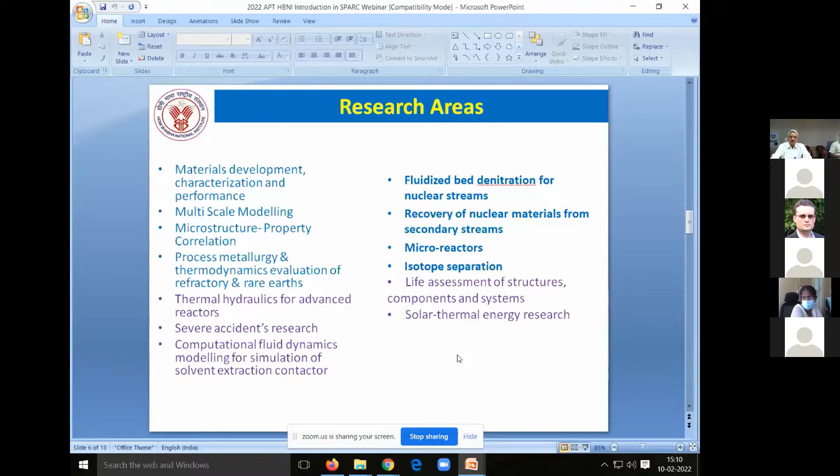So these are the various areas. However, particularly in our lab, we have been mostly pursuing research in mathematical modeling, control, estimation, and fault detection.

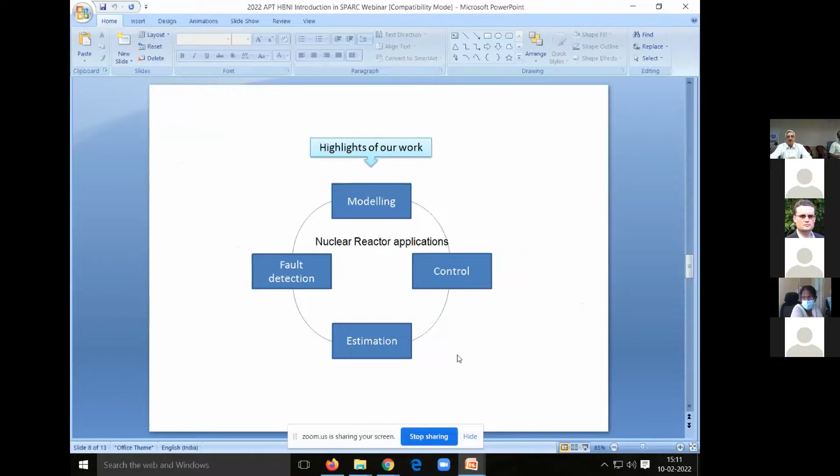Out of our effort, we have been able to make a real-time simulator of a nuclear reactor where we can study normal and off-normal conditions of a plant, of course not the accidental situations. This is mostly used to validate the C&I systems design using a hardware-in-loop kind of testing.

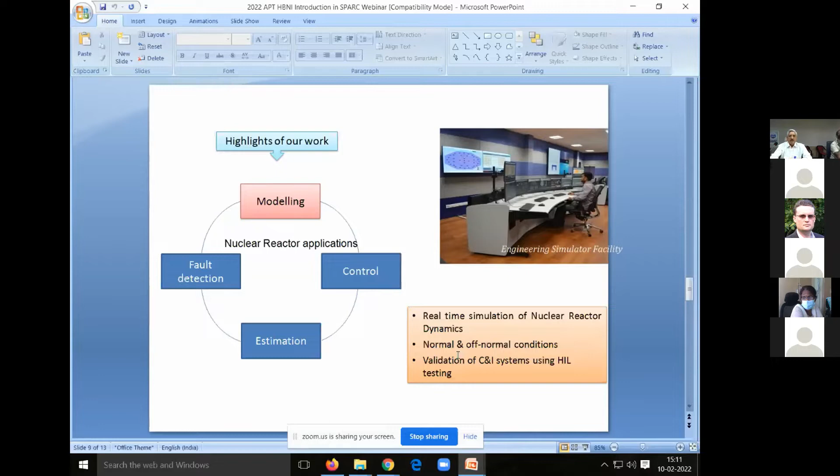We have done some control studies based on linear quadratic regulators, sliding mode control, etc. Conventional output feedback also we have done, fast output sampling, periodic output feedback.

I want to mention that in 2006, our Tarapur atomic power plant was facing a lot of instability issues. So we did analysis based on the most simple linear stability analysis. We redesigned the controllers and applied our knowledge to solving the real life problem at the 540 megawatt Tarapur atomic power station.

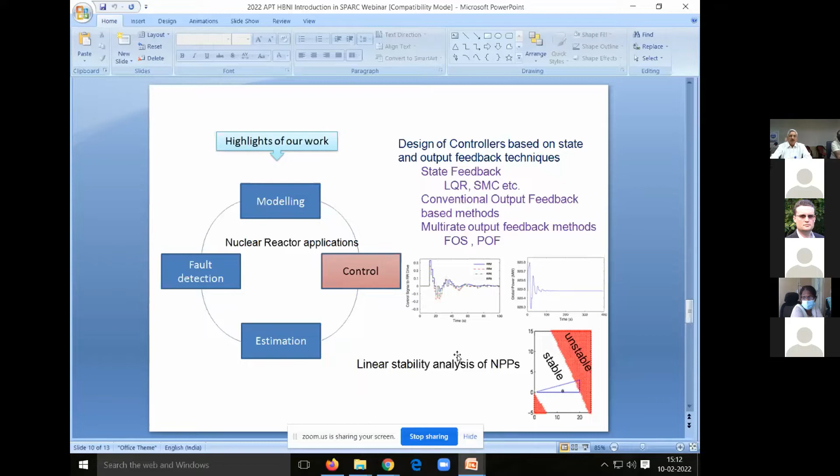In the area of estimation, we have developed a reactivity meter which is used in our small nuclear reactors for measurement of reactivity worth of burnable pins, fuel rods, and protection devices.

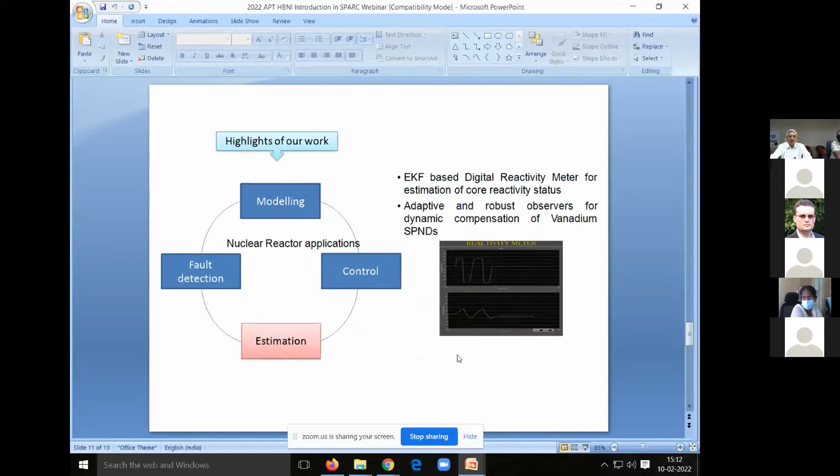In fault detection, we have applied principal component analysis and other techniques for sensor fault detection and diagnosis in some areas of nuclear reactors.

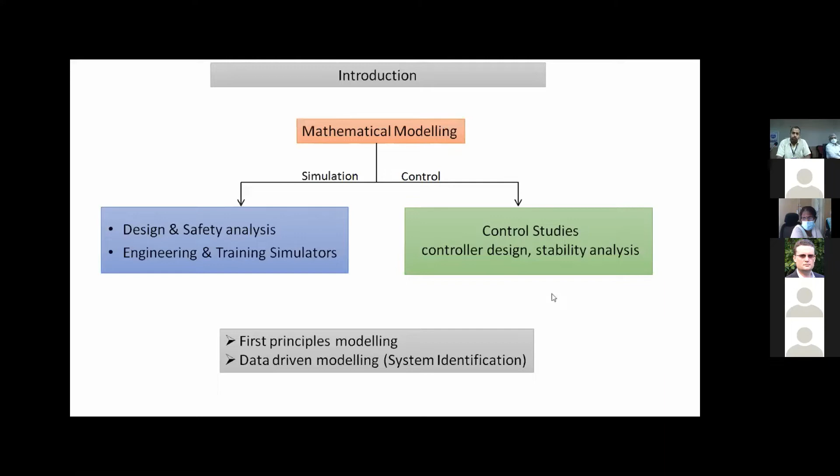A thermal reactor consists of fuel, coolant, and moderator. Coolant transports the heat generated in the nuclear reactor, moderator slows down or thermalizes the fast neutrons that emanate from the fission reaction, and the reflector surrounds the core to prevent leakage of neutrons from the core region.

However, some of the neutrons will also be liberated from the beta decay of fission products, and this fraction, even though minor, significantly helps in controlling the nuclear reactor dynamics. So these fast neutrons undergo scattering collisions with the lighter nuclei, and then in that process they get slowed down. Some of them get leaked out from the core region, and they cross a kind of wall called the resonance wall, wherein non-fission absorption takes place within the fuel itself, and then whatever leftover neutrons there are, they thermally diffuse, and finally get absorbed in a fission reaction, or get absorbed in a non-fission reaction.

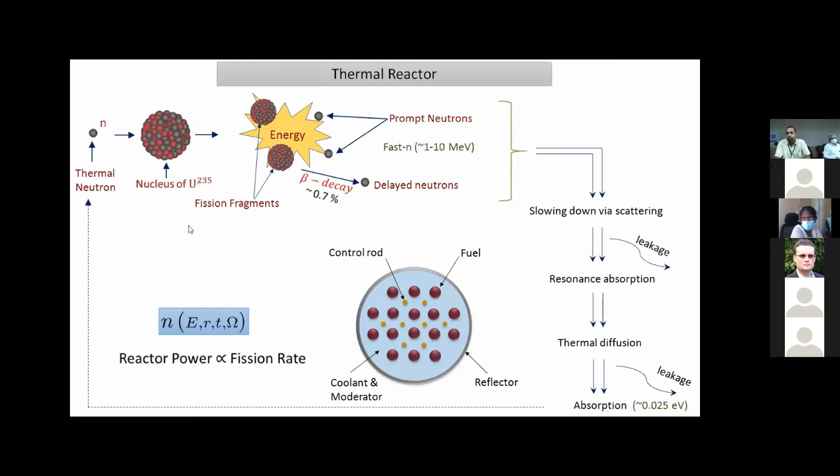So even though the fundamental governing equation is transport theory, diffusion theory based approximation is widely applicable and used in nuclear reactor analysis. In diffusion theory, first the continuous energy spectrum of neutrons is converted into discrete energy groups, and then depending on the number of energy groups, we have one group diffusion theory or multi-group diffusion theory. Specifically in multi-group diffusion theory, there's the two energy group theory, where we discretize the energy group into fast and thermal neutron groups, and one group diffusion theory are used in modeling for control studies as well as for real-time simulators. Many energy groups are generally of significant interest to physicists, which they use in lattice calculations or design calculations.

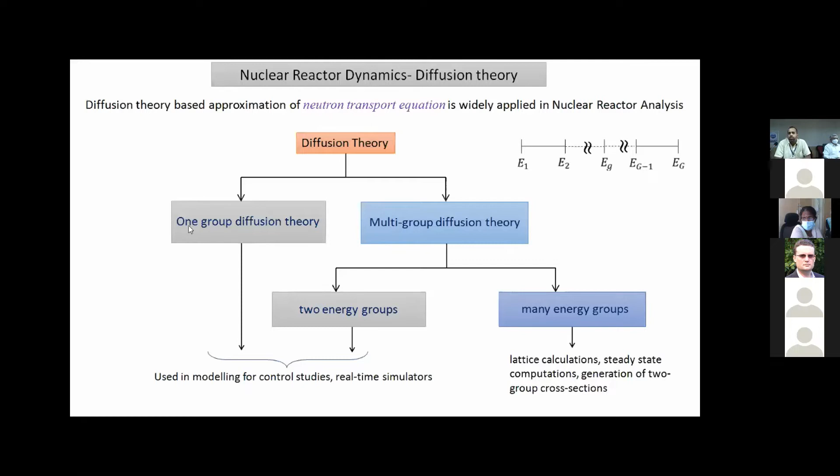So coming to the one group diffusion equation, it is nothing but a neutron balance in any arbitrary volume V. As shown in this equation, the time rate of change of neutrons in any arbitrary volume V is equivalent to the production term minus absorption in the volume V and net leakage from V. The net leakage term, since we are approximating with diffusion theory, can be directly written in terms of the flux gradient using Fick's law.

And the source basically consists of two terms. One is the neutron generation, that is the prompt neutron generation term, and the other whose dynamics is dependent on the decay, beta decay of the precursors. Generally, these precursors are grouped into 6 normally, or more conventionally. And then in addition to this diffusion equation, we have to study the time dependent dynamics of these precursors to account for the total neutron source production within a volume V.

The usual approach to solve this PDE is separation of variables into a space dependent term and a time dependent term, and by assuming that the time independent space function, or assuming that the fundamental shape of flux within a core doesn't vary much with time, we can obtain a set of ordinary differential equations, popularly known as the point kinetics model of a nuclear reactor, where it consists of the dynamics of neutron concentration and the precursors, and a term known as reactivity rho is an input to this model.

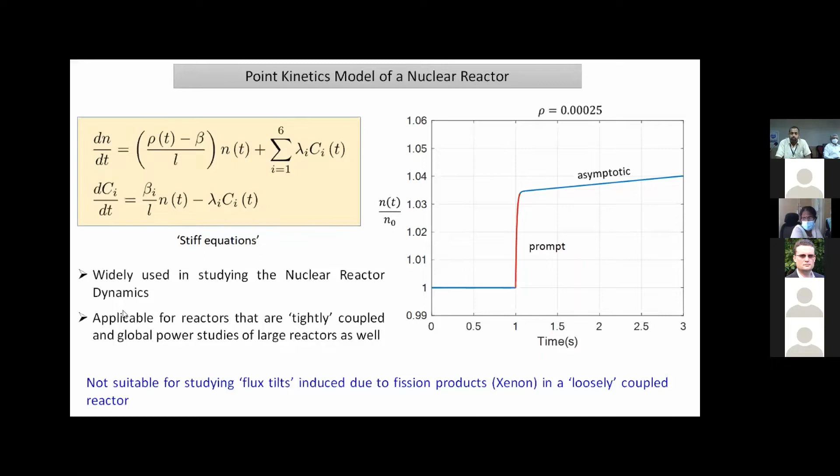Now a quick glimpse of how xenon affects reactor dynamics. Xenon is one of the fission products, and even though its yield is very low, it has a very high thermal neutron absorption cross section. Due to this, the dynamics of xenon following any instantaneous flux change will be opposite to the direction in which the flux has changed. For example, when there is an instantaneous flux reduction, xenon concentration initially builds up because of reduced absorption, and after a long time it achieves a peak and its behavior starts inverting. Such inverse behavior poses a serious control problem, causing out-of-phase spatial oscillations in loosely coupled reactors.

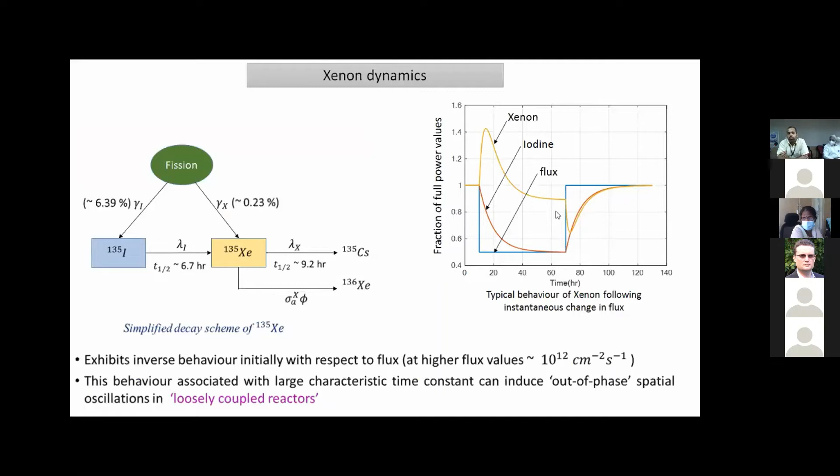So how do these oscillations occur, and in which direction? For any 3D problem, we can consider oscillations of three modes: azimuthal, radial, or axial, where plus indicates one half of the core and minus indicates the other half. Power in one half of the core can have an opposite trend while flux in the other half has an inverting trend during spatial oscillations. Higher order harmonics are also possible depending on the type and dimensions of the reactor.

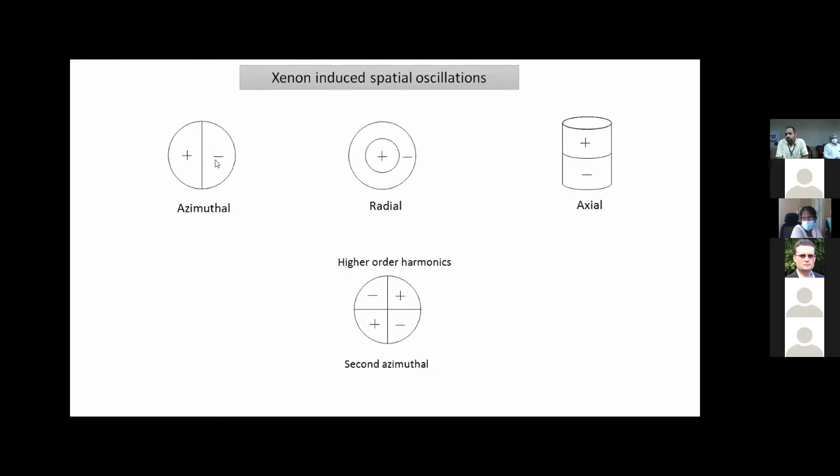Here I have shown a simulation where a typical PWR exhibits xenon-induced spatial oscillations. In PWRs, control rods are normally distributed radially to avoid asymmetric reactivity perturbations along radial directions. However, for power maneuvering during power operations, these control rods move from the top of the core towards the bottom. This can lead to asymmetric perturbations along the axial direction, and if left uncontrolled or unmonitored, they can lead to out-of-phase oscillations as shown here.

Even though the total power remains more or less the same, one half of the core starts generating more power and the other half generates very little power. So on one side, the core thermal margin limits may be exceeded, which can be a serious safety concern. For this purpose, in PWRs, axial offset is generally monitored during normal operation, and if required, spatial control is invoked automatically to ensure the axial offset stays within the target band.

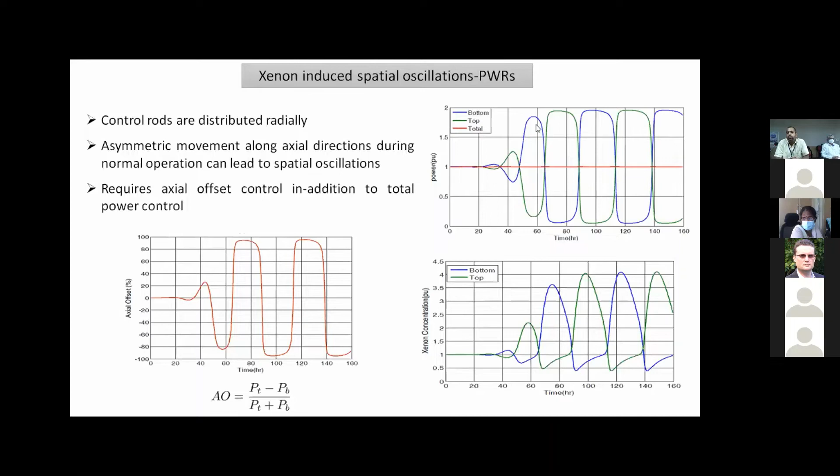Similarly, there is a reactor called the advanced heavy water reactor, which is a boiling water, vertical pressure tube type reactor using light water coolant and heavy water moderator. This reactor has very large radial dimensions, due to which azimuthal neutronic decoupling can happen, and xenon-induced spatial oscillations can occur along the azimuthal direction if not monitored and controlled.

Hence, to study the dynamics of these reactors, we need a space-time kinetics model rather than a point kinetics model, both for simulation and controller design. There are many standard techniques in the nuclear reactor domain to model such reactors, including modal methods, flux synthesis methods, or nodal methods. Multi-point kinetics modeling, developed under the nodal methods framework, is prominently used in control and simulation studies, which I will be presenting.

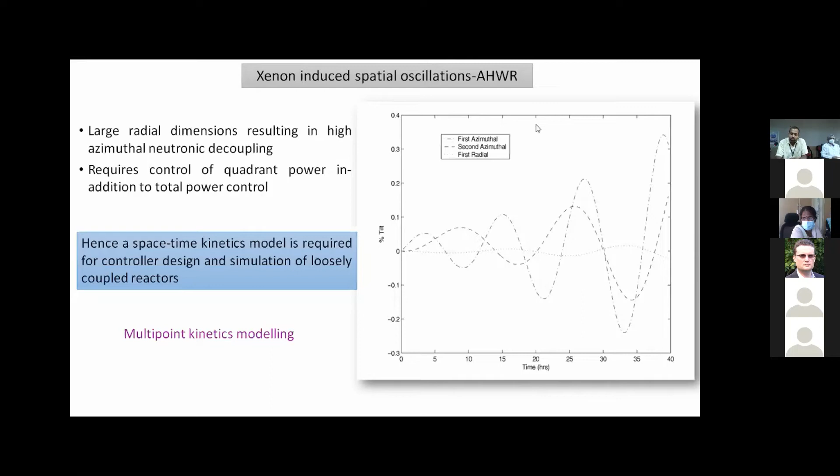Again, the governing equation is the diffusion equation, but in the case of the two-group diffusion equation, we have to write it separately for fast flux and thermal flux. The source term remains the same and occurs only in the fast flux dynamics, because whatever neutrons are released subsequent to fission are fast neutrons.

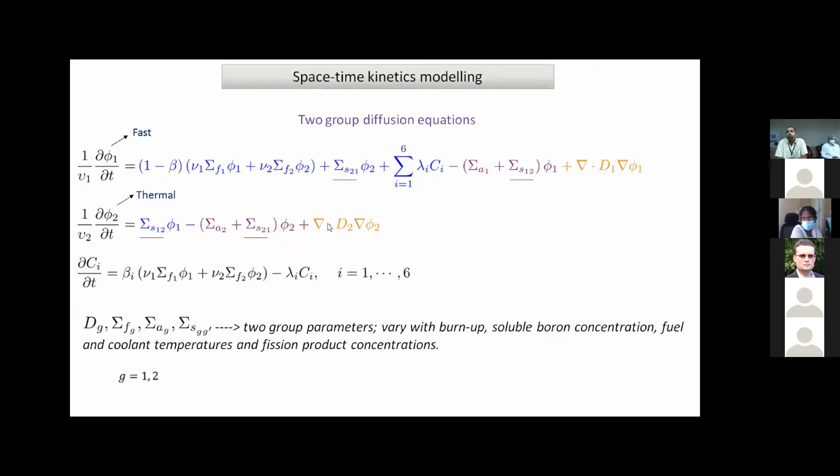In addition, we have scattering terms, where there can be upscattering of a thermal neutron gaining energy and converting into a fast neutron, or a fast neutron losing energy due to scattering and becoming a thermal neutron. These two scattering terms are additional compared to the single-group diffusion equation. The absorption cross-section, diffusion coefficients, and fission cross-sections together form what we call the two-group parameters, which normally depend on the moderator and coolant properties in the reactor core.

Since those diffusion equations are partial differential equations, one method to solve them is to discretize these partial differential equations along all the spatial directions, by dividing the core into a number of non-overlapping coarse meshes called nodes. Each node can be characterized by a set of homogenized two-group parameters, and each node can be defined with a homogenized flux, which is a volume integration of the flux within that particular node.

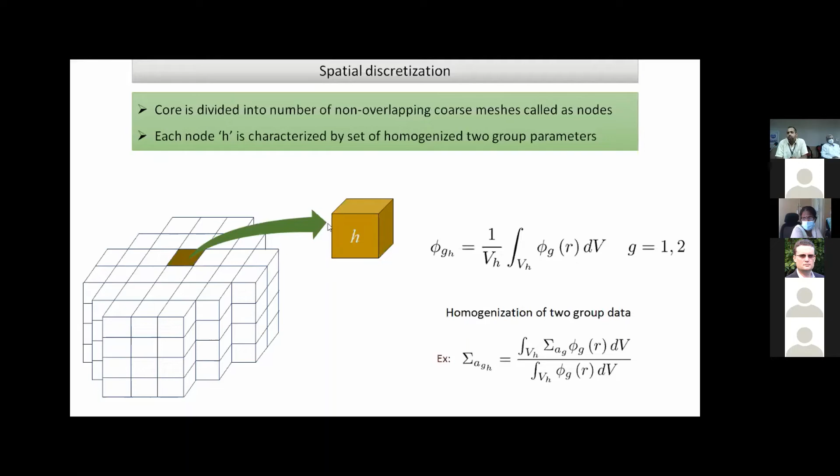In this manner, by integrating the differential equations in a node, we can get rid of the partial differential terms with reference to flux, and with reference to the leakage term or the diffusion term, we can have a coarse mesh finite difference approximation.

By enforcing continuity across the boundary, we can approximate the leakage term as a function of adjacent nodal fluxes and a coupling coefficient, which signifies the coupling between adjacent nodes. This coupling coefficient determines the coupling between two nodes and is a strong function of the node geometry and also the diffusion coefficient.

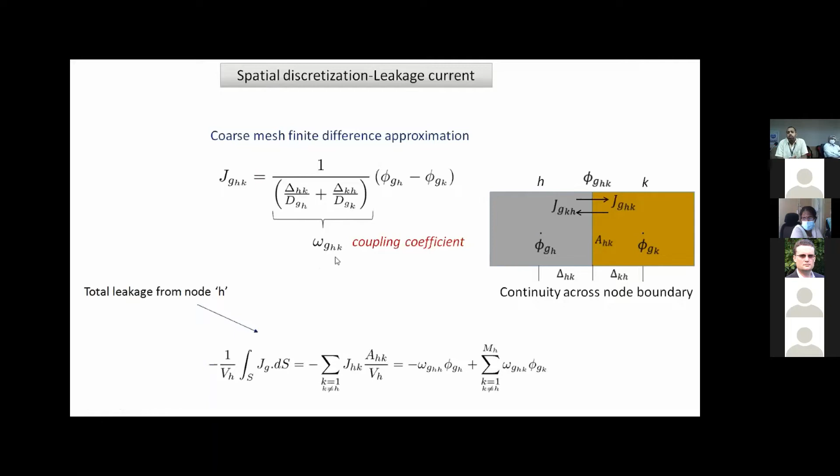In this way, we can integrate the diffusion equation, which is a partial differential equation, and obtain a set of ordinary differential equations within the node, which can be readily solved in time to obtain the dynamics of fluxes within each node, thereby obtaining the temporal as well as spatial behavior of the reactor.

However, further approximations can also be done to obtain the differential equations directly in terms of power, which can be used mainly for control studies. Till here, this set of equations are mainly used in simulators, whereas further approximations are also possible for control studies to reduce the model order.

By defining a spectral index, that is the ratio of fast flux to thermal flux, and assuming that it can be completely defined in terms of two-group parameters, we can convert that two-group diffusion set of ordinary differential equations into a single power-dependent equation by using this approximation, which is normally known as a 1.5 group approximation.

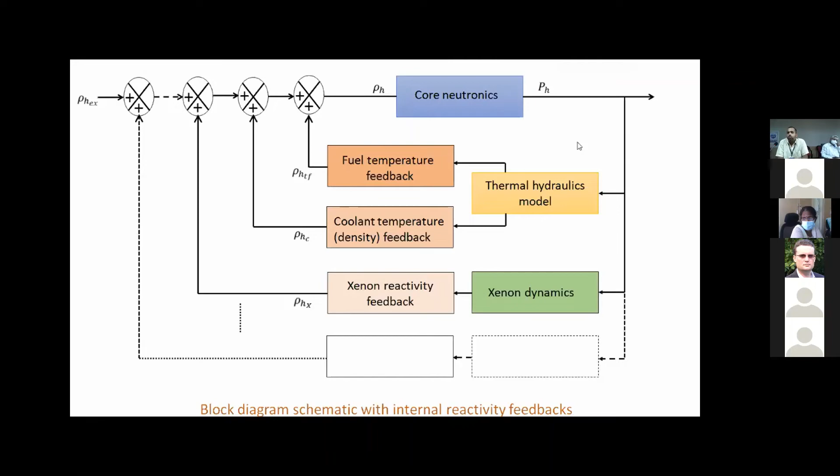For example, thermal hydraulic feedbacks may have characteristic time constants in the order of seconds, whereas xenon feedback will have characteristic time constants in the order of many hours. So it is essential to consider dynamic models of these thermal hydraulic feedbacks along with xenon feedbacks to account for the total overall neutronic dynamics within the core.

So fission product poisoning within the node can be directly obtained by writing the decay models within the node. Fundamental formulations as shown earlier will be in terms of flux. However, with a usual change of variables, we can represent this in terms of power. Net reactivity due to xenon or due to some other poison like samarium can be directly obtained based on their concentration values.

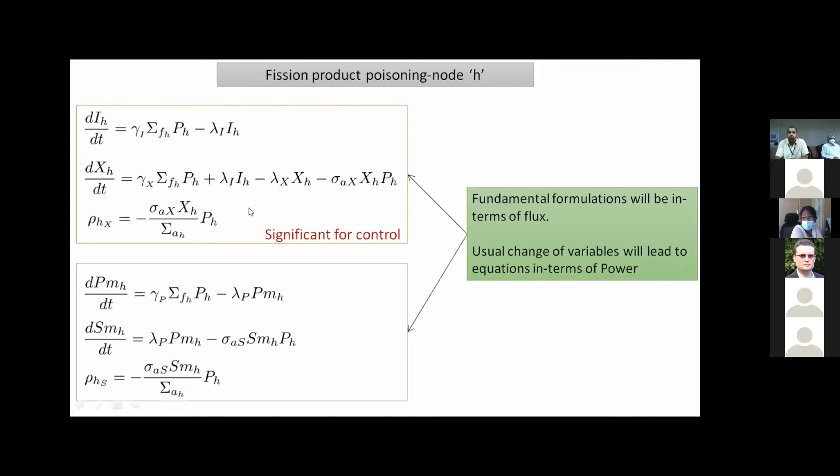Now coming to thermal hydraulics modeling of PWRs. PWRs generally consist of fuel pins which are mechanically grouped into fuel assemblies. However, there is no hydraulic isolation among the fuel assemblies. So ideally, a thermal hydraulic problem in PWRs is a 3D problem, and it is solved in that manner mainly for safety analysis, to identify the hotspot or the hottest fuel pin. However, for control studies, such elaborate and complex models cannot be directly used.

So we resort to two major types of approximations. One is assuming multiple channels in parallel, connected only at the inlet plenum and outlet plenum, so that there is no interaction among fuel assemblies within the core region. Or another approximation is a single channel connected only at inlet and outlet plenum, and across the axial direction we assume whatever power is produced is given to the coolant in a lumped fashion. Since we generally nodalize the PWRs along the axial direction, the second choice is normally followed in modeling the thermal hydraulics of the heat removal system in a PWR.

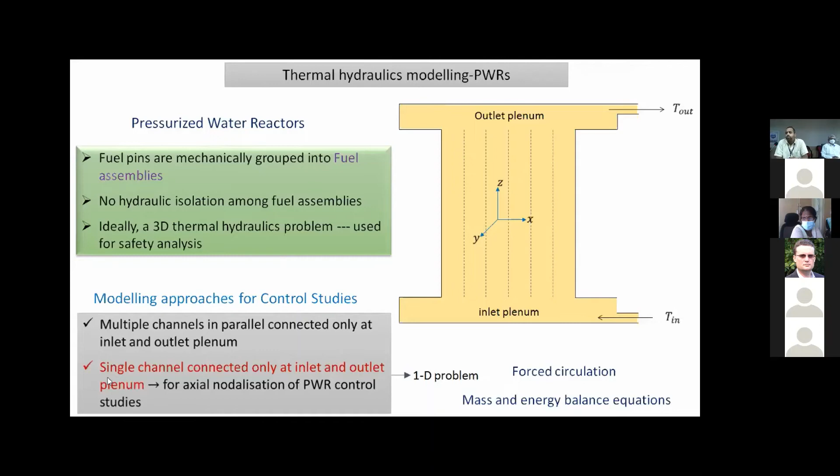And since most PWRs have forced circulation, mass and energy balance are normally sufficient from a control studies point of view. The flow will be based on the number of pumps that are operating under various operating conditions.

However, when it comes to BWRs, these fuel pins are enclosed by flow boundaries, which can be cans, ducts, or channels in case of AHWR. So essentially, these fuel assemblies are isolated, and it becomes a 1D problem at the assembly level. However, within the assembly, the flow behavior can still be a 3D problem, which is again of specific interest for safety analysis. Since one of the BWR examples I have taken is AHWR, and nodalization along the radial direction is most preferred for that kind of reactor, we follow the approach of multiple channels in parallel connected only at inlet and outlet plenum.

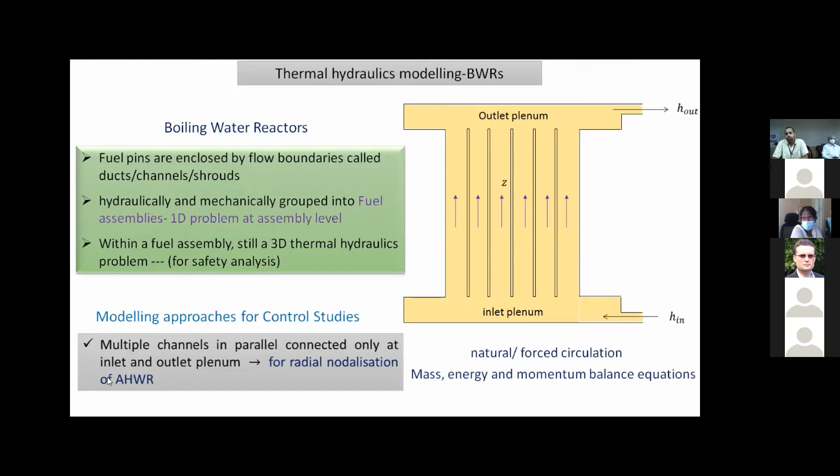However, BWRs, especially AHWR, have natural circulation. So in addition to mass and energy, we have to consider the momentum balance equation also, to obtain the governing equations of these thermal hydraulic models, which can be used for control studies.

Now I'll try to summarize how the thermal hydraulic model set of equations looks for a typical PWR and AHWR. This figure shows a simplified schematic of a PWR, wherein the coolant from the cold leg enters into the core region, picks up the nuclear heat generated, and is transported via the hot leg back to the steam generator. In the steam generator, cold liquid or feed water enters, and heat from the primary heat transport system or reactor coolant system is transported to the secondary system, and the steam generated in the steam generator is transported to the secondary cycle.

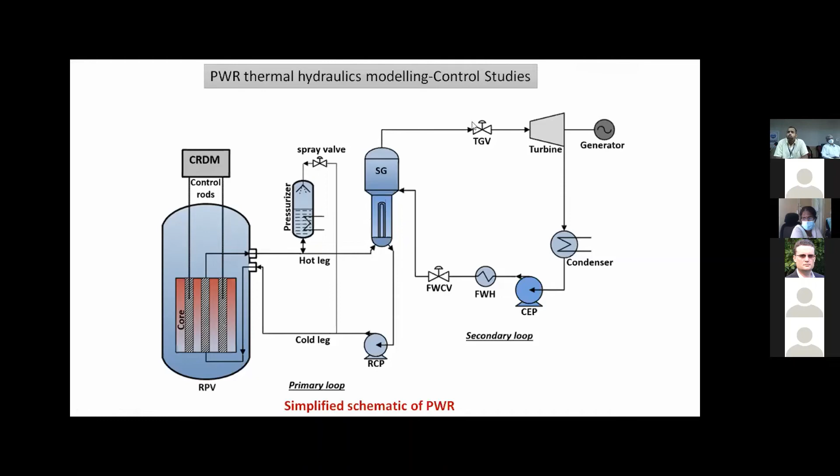From the modeling perspective, we can divide this entire reactor coolant system into 4 regions. In the core region, the modeling approach is as indicated earlier, a single channel coupled only at inlet plena and outlet plena. At the core exit, there is a finite volume of hot leg, denoted as control volume 1. Heat transfer in the SG is control volume 2, and the cold leg is control volume 3.

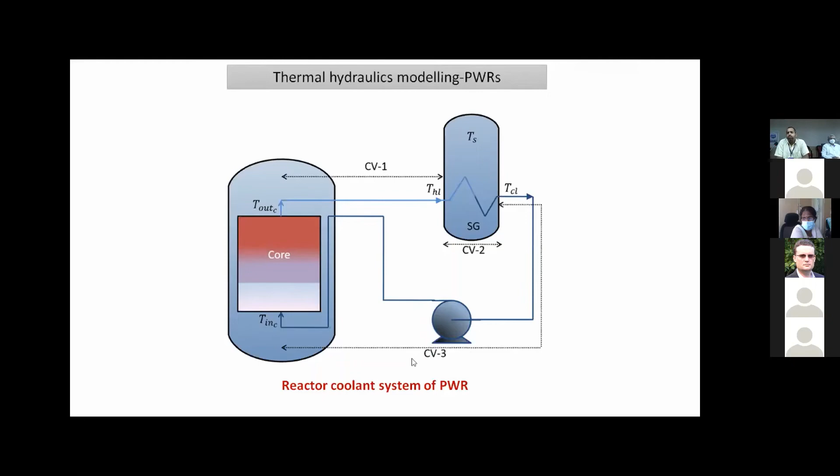So what we can really do is go for a lumped parameter modeling to account for the transport lags that occur in this hot leg, cold leg, and the heat transfer volume. And in the core region, we can model the system as per the number of axial nodes.

Within the core region, by writing the energy balance equation and assuming only convective heat transfer from the fuel element to the coolant, these are the set of equations which define the heat transfer from the reactor to the coolant. Here we can see that P_h, obtained from the core neutronics, is coupled to this fuel heat transfer model, and then through the convective heat transfer coefficient, the coolant temperature dynamics can be defined.

These nodes along the axial direction are thermal-hydraulically coupled such that the outlet from one bottom axial node becomes the inlet temperature to the top axial node residing above it. Then reactivity feedbacks associated with fuel temperature and coolant temperature can be expressed as polynomial functions, normally first order or second order.

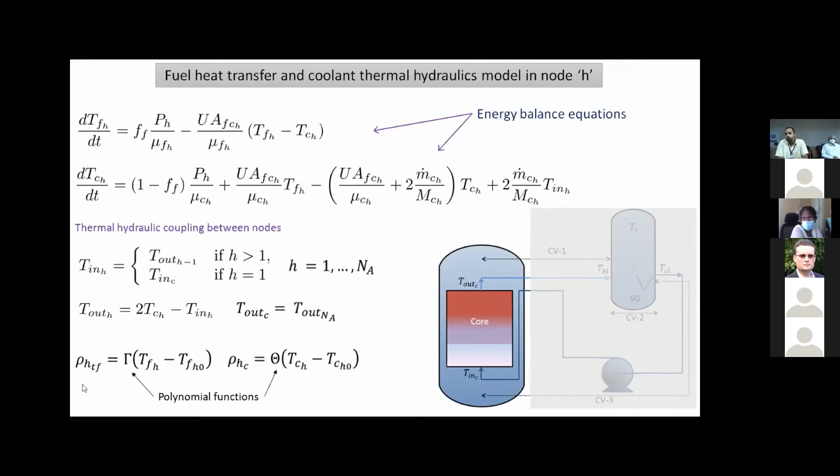As indicated, the transport delay in the cold leg and hot leg can be accounted for by using simple energy balance in these sections, so that we can obtain a set of first order differential equations in each section.

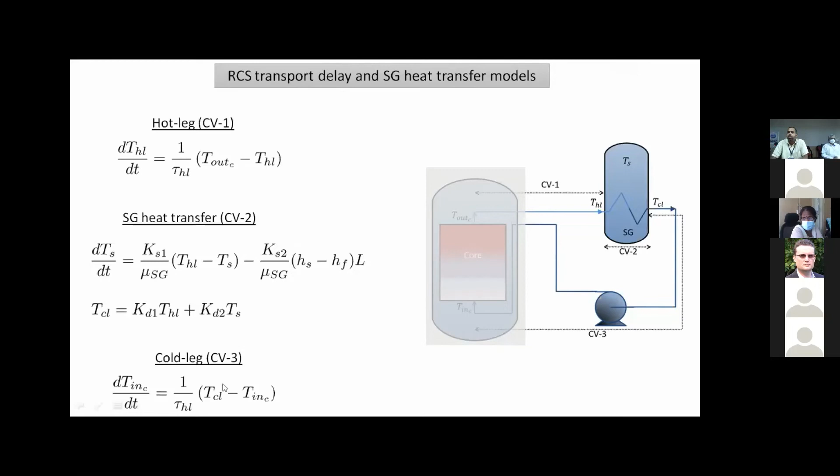Now when it comes to BWR modeling, I'll give a typical example of how advanced heavy water reactor thermal hydraulics modeling is carried out.

As indicated earlier, this is a natural circulation reactor, so we need to consider the momentum balance equation to obtain the circulation flow, which cannot be considered as an independent parameter.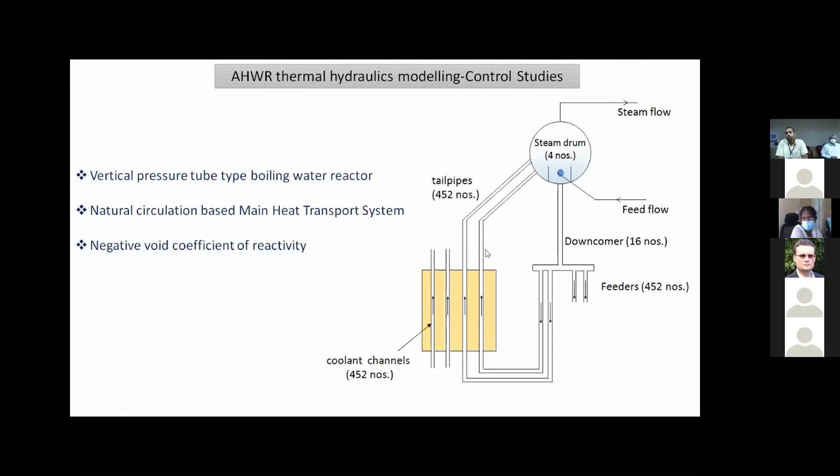So modeling approaches generally used for control studies - one is the homogeneous equilibrium model, in which we assume that both the water and steam phases have the same velocity and are under thermal equilibrium. With this, void fraction can be expressed in terms of the steam quality or flow quality.

This figure shows a typical variation of void fraction with various pressures, and void fraction basically determines the density of the coolant. So depending on the void fraction, we can compute the density, and depending on the density, we can compute the corresponding reactivity feedback that can be fed back to the neutronics model.

The approaches used here are lumped parameter integral average approaches to solve mass and energy balance in each lumped section.

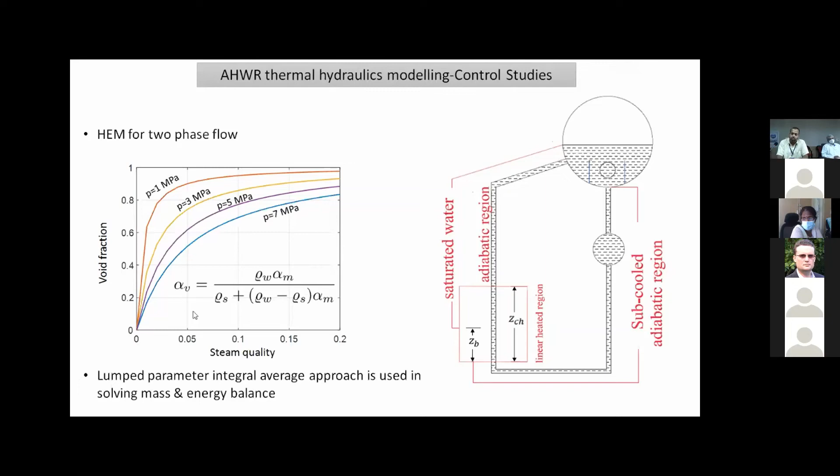So a typical example of how we write equations for the core region - we consider an inlet flow, circulation flow, and an inlet enthalpy to the core region, where some amount of heat is used to convert this single phase liquid into saturated liquid, and afterwards the heat transfer is in the two-phase regime. As it is a compressible flow, outlet flow will not be equal to inlet flow.

So we have to write both mass and energy balance equations, and by simplifying these we can get rid of the exit flow and cast the equations in terms of the inlet circulation flow itself. One of the state variables will be the flow quality or steam quality.

Then void fraction can be directly obtained using a static relation with steam quality, and density can be computed from the void fraction, from which we can obtain the void reactivity feedback. Equations for other sections also can be obtained in a similar fashion.

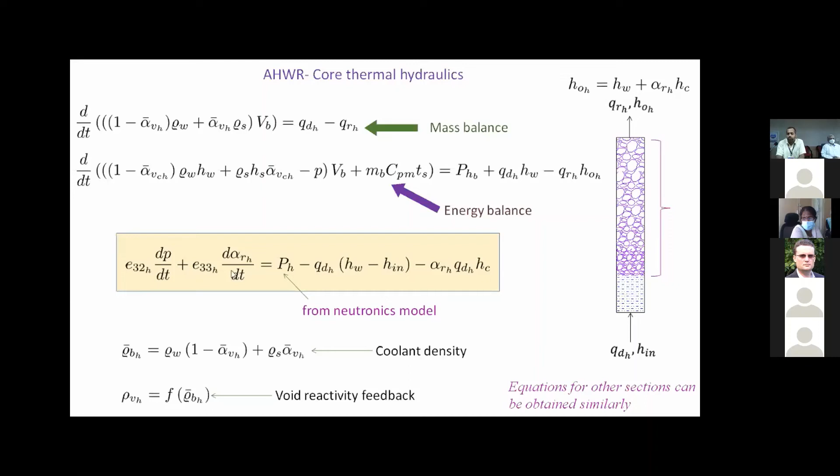So in a crux, the overall model used for control studies looks like this. The central part is the core neutronics model, where in each node we have a set of differential equations defining the precursor and power dynamics within that particular node.

This is coupled with the fuel heat transport and coolant thermal hydraulics model, and then the feedbacks from this model are used internally in the neutronics model, similarly for xenon and samarium dynamics.

This thermal hydraulics model is coupled to the secondary side, where a load demand can be considered as an external input. Through this transport lag, it is coupled with the fuel heat transport and coolant thermal hydraulics model.

In addition to this, we have a control signal which we are supposed to control through the design of an automatic power controller. This can be considered as one more input, and depending on the control rod dynamics, we can compute the position of the control rod, which itself can be expressed in terms of reactivity due to this control rod.

So in this way, we can model the coupled nuclear reactor core and heat removal systems. Such exercises we have carried out for AHWR, and also we have done for typical PWRs.

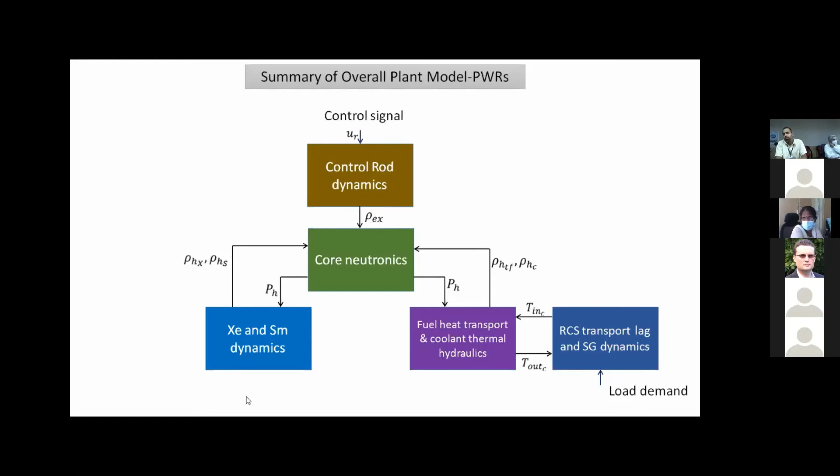I'll show some of the transient results, open loop transient results, which we have obtained through these simulation procedures. Before going into that, one important issue is to obtain the steady state conditions. Since these are highly coupled sets of nonlinear equations, a most appropriate approach to obtain the steady state conditions is to solve them iteratively by assuming some initial solution.

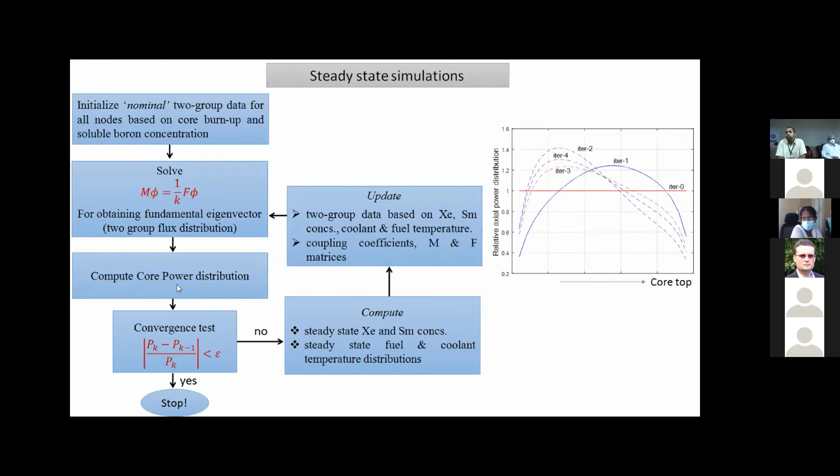The right hand side curve shows how one can assume a flat flux distribution and then solve the diffusion equation in terms of an eigenvalue eigenvector problem to obtain the fundamental eigenvector which corresponds to the steady state flux distribution. From that we can obtain the core power distribution, which can then be fed to the thermal hydraulics model. Based on the thermal hydraulics parameters, the two group parameters can be recomputed, and we proceed in this manner iteratively until we converge on the steady state solution. So there is significant simulation involved in obtaining the steady state solution also for this set of coupled equations.

So a typical response of PWR for load disturbance I am showing here. Figure A shows that there is an initial step reduction in the secondary side power, which we can consider as turbine power. The moment there is a reduction in power, more heat is being generated from the primary than is being removed. So the pressure in the secondary side of the steam generator starts building up, which manifests as an increase in the steam temperature. When steam temperature increases, this leads to increase in the coolant inlet temperature.

So when relatively hot water enters into the core, it manifests as negative reactivity to the core, and then the reactor power also starts gradually decreasing. In this way, we can consider that after step reduction, the reactor tries to follow the turbine and stabilize in a global power sense at a reduced power. This actually demonstrates the inherent global stability characteristics of a PWR due to strong negative reactivity feedbacks.

A similar trend can be observed when I again raise back the turbine power to 100%.

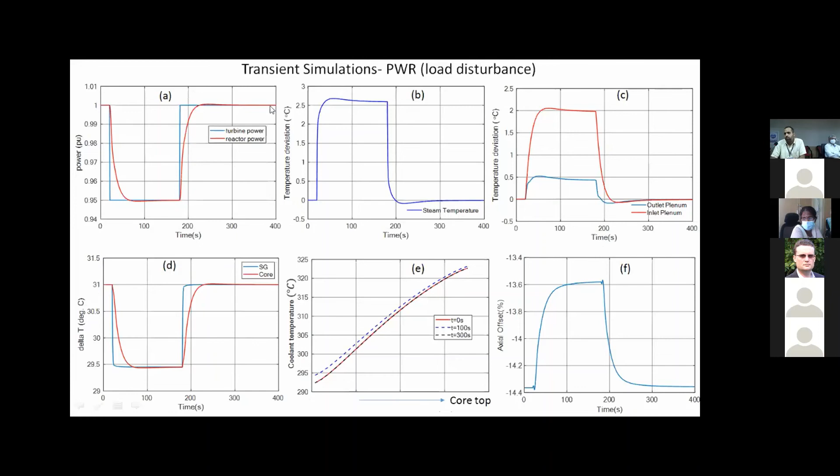This shows a typical control rod transient where I am trying to add an asymmetric perturbation to the core by inserting the control rod up to 50% from the top of the core, and it can be seen that the initial flux distribution got tilted more towards the bottom as the rod is inserted more. Even though the global power again reaches back to the initial value, there is a flux tilt where the lower portion of the core starts producing more power and the upper portion starts producing less power. When I again bring back the control rod to its initial position, the flux profile tends to match its initial condition.

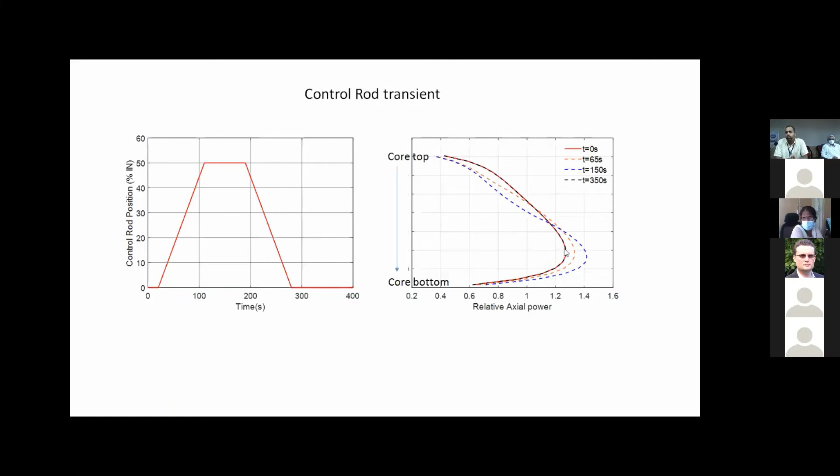This is how we generally model the nuclear reactor and associated heat removal systems in a coupled fashion, and then this nonlinear model is normally linearized at various operating conditions to study the stability properties, and the same will be used in the controller design. I have completed my presentation. Thank you.